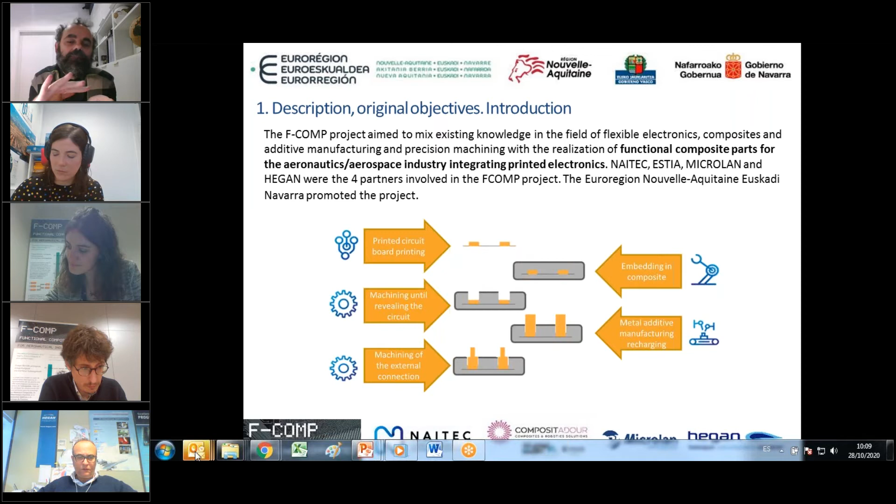The results and process of flexible electronics composite machining has been shown as a success, and we are now in a position to offer this technology, sharing it between different partners, companies and specialized groups where this task is needed. This is the concept behind FComp. We need to do a lot of work choosing materials, choosing different technologies, and how to do the composite, how to do the circuitry.

We will show it briefly in the next minutes, but now let me introduce in more detail our partners. So Martin, please.

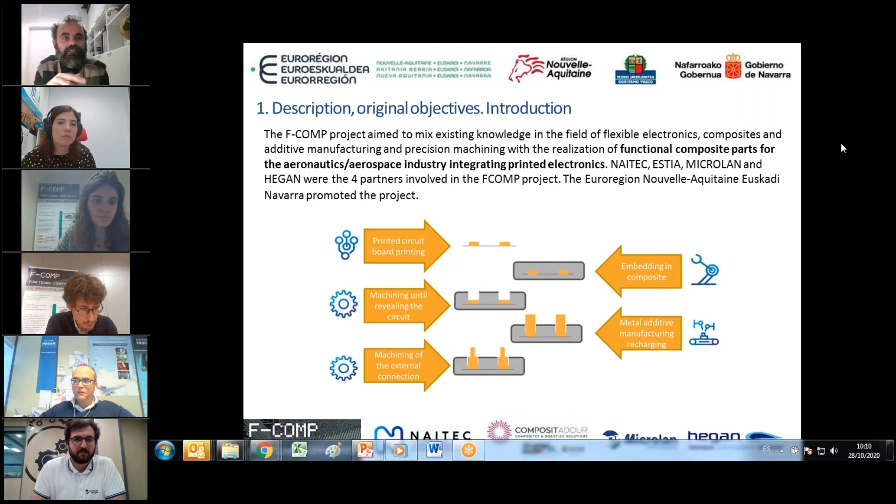We start with the centers at both sides of the Pyrenees. There are two centers. One is NAITEC, located in the Navarra region, focused on mobility and mechatronics. We focus our attention on this new way of moving, how to electrify vehicles, how to share information between infrastructure and vehicles. Within this framework, we develop flexible electronics for the automotive sector mainly, including electronics within interior parts or other plastic parts you can find inside any car, like headliners, seats, rooftops, etc.

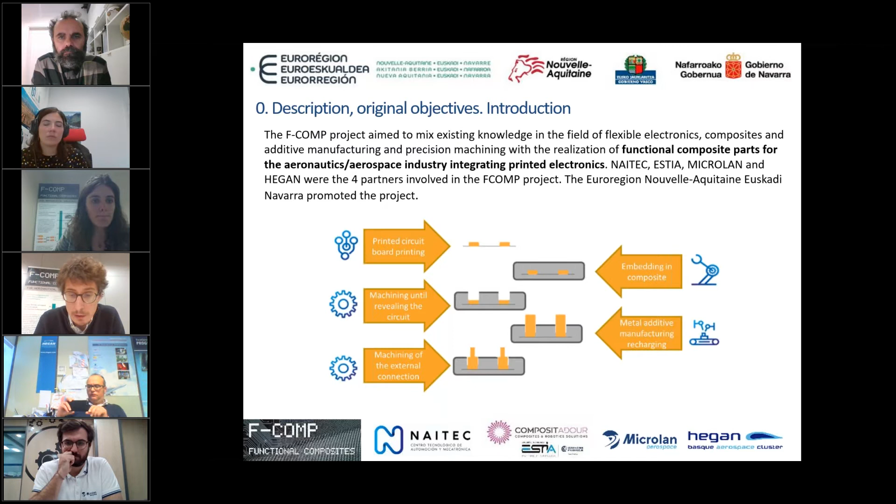As Fernando has explained in the presentation, the initial idea of FComp was developing the embedment of sensors in composites by doing 5 tasks done in a row. First, building a sensor, embedding it in the composite, then machining for revealing the contacts, putting some copper on these points, and later manufacturing the final contacts. This is the initial idea.

Putting this a little bit on the ground, the idea is just taking, as said, one sensor—you can see in the image on top—and putting it in between different plies of a composite material. For that, we need to first make the design of the sensor. In this case, we have decided to do a strain gauge sensor with three gauges. This is just for the purpose of having a sensor, but indeed we can put whatever other design.

The design included not only the sensing part, but also how the connections go outside. After this initial design, the project moved into a trade-off for material and process selection and manufacturing.

You can see in the middle image below all the process steps we followed, where we needed to do some iterations that I'll explain later. Finally, we verified that our full design is okay by doing some testing, mainly mechanical tests, as well as some functional testing.

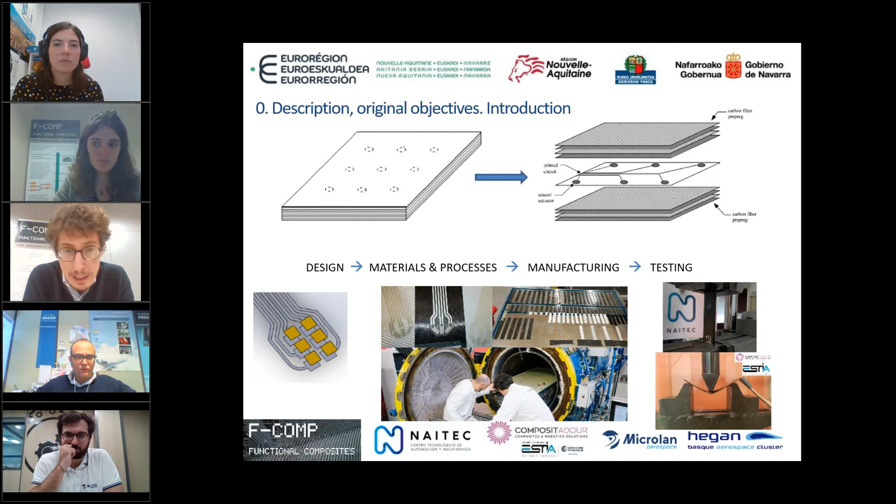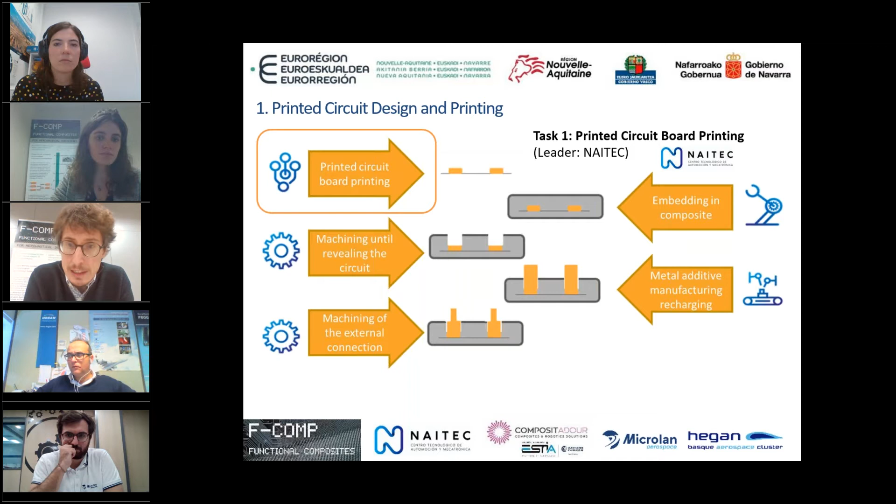Let me go step by step explaining what we have done. The first task was the printing of the printed circuit, a task led by NAITEC. We followed a series of trade-offs, starting with the sensor design.

As previously explained, we selected a strain gauge. We made the detailed design of the sensor itself plus the contact, and we started iterating because the thickness of the tracks is related to the capacity of the process for manufacturing the track with the ink.

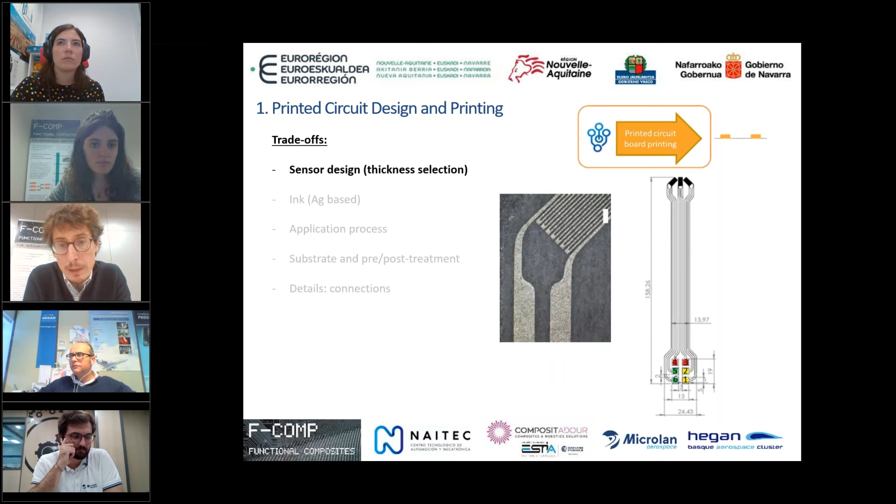So we made a trade-off between different thicknesses, reaching an approach where 70 microns thickness of the track was selected. The image in the middle shows those small tracks at 70 microns. As said, this is linked with the selection of the ink.

We made a trade-off between different inks that we have in-house. NAITEC has very good relations with some companies manufacturing inks here in Navarra. And then we did this trade-off of properties of the ink, which is also related to how we do the process.

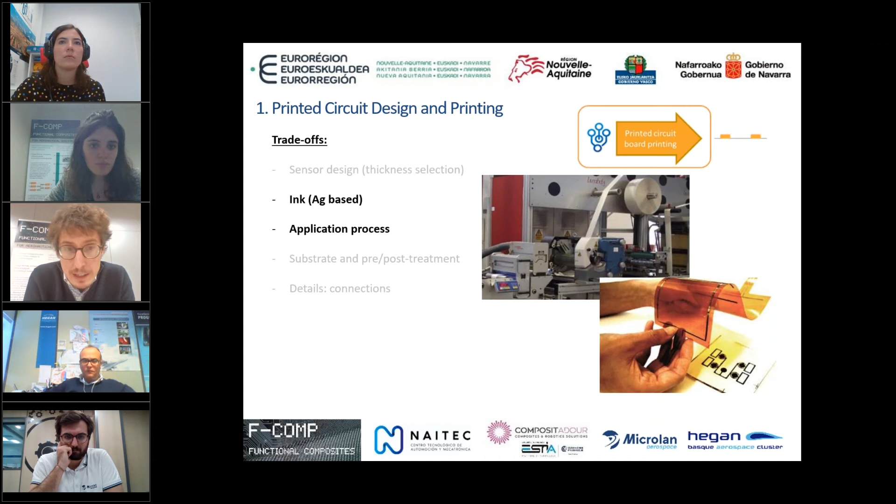We need to prepare the surface material, add additional dielectric material, decide how many layers, and how we put it in the oven. This is very iterative, and mainly related to the substrate that we use.

We tried 2 or 3 types of paper. We used carbon fiber, glass fiber, and polyimide (Kapton) for doing the trials, because some of them have good properties for some things and others for other things. Finally, we reached the conclusion that the best balance was with the Kapton.

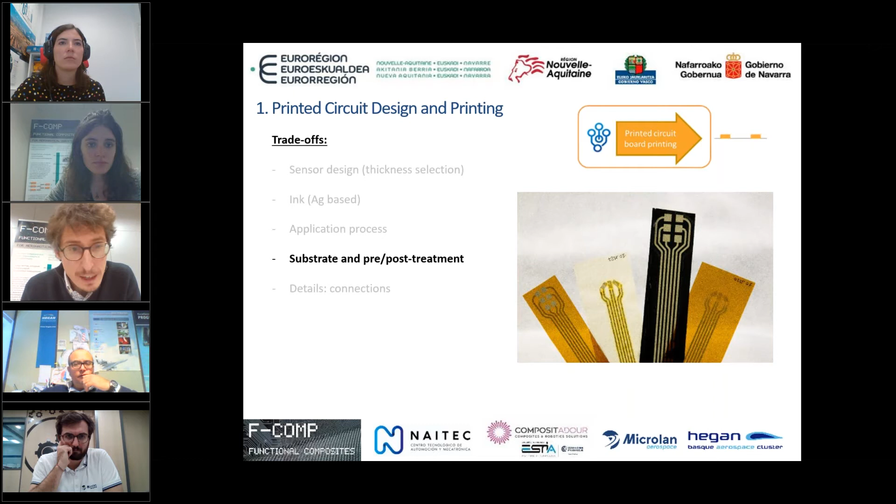We found during the project that we needed to define some details like the connections, because some points were not as good as we wanted, and we needed to look for a solution. You can see in the image, using adhesive conductive glue and putting in some connectors. We needed to make some details that we'll explain further later on.

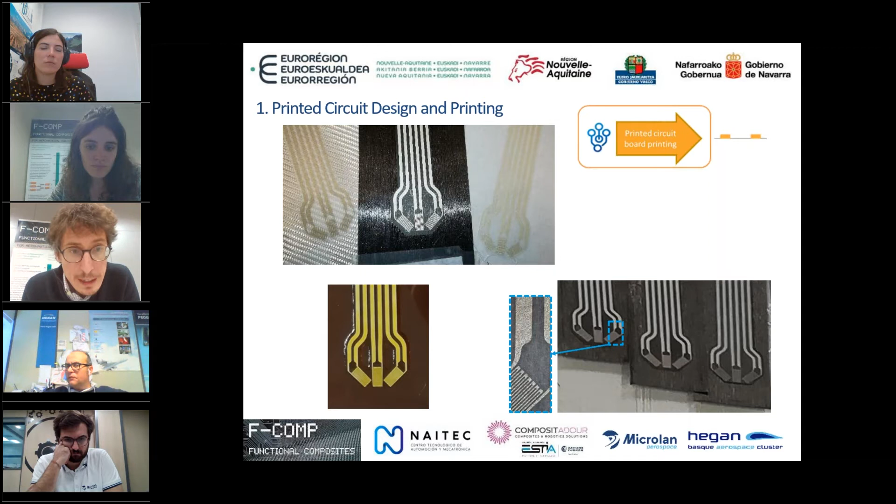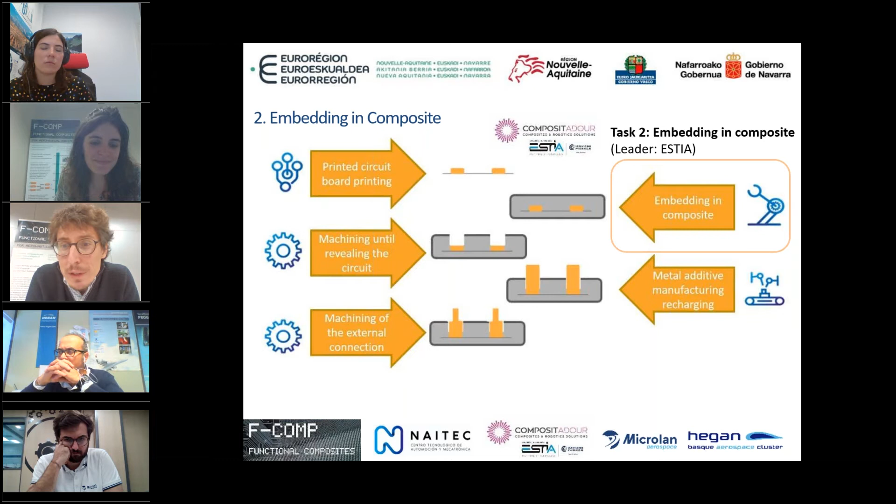We took these almost 200 samples to COMPOSITADOUR so they could start with the embedding in the composite. First was the selection of the material to be used: an unidirectional carbon fiber prepreg, very common in the aeronautical sector, which COMPOSITADOUR is very familiar with, so it's easy for them to work with.

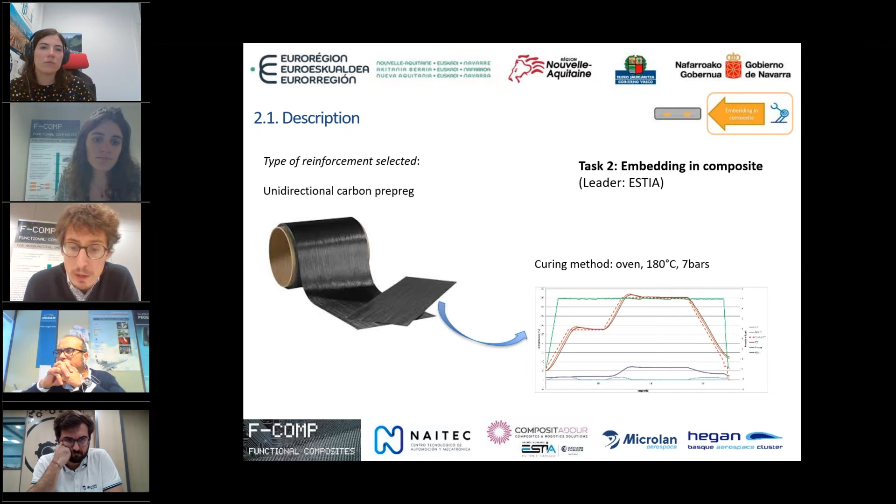This material, after doing the stack up, is sent to cure in the oven at 180 degrees with 7 bars for about 2 hours, and then we get the final samples with the sensor embedded in the composite. With that, we started to verify the best solution of substrate by checking how we minimize the mechanical impact and delamination problems.

The first test we did was the tensile test. Here we saw, as you can see in the graph on the right, some reduction in mechanical performance. To check that, we prepared some coupons without the sensor inside, taken as the reference, shown in the column furthest right, and you can see how, depending on the substrate, the maximum tensile strength decreases.

We saw that the most promising were the papers with different grams, and even with them we had a reduction of about 7 to 18%. Even with the polyamide we had this 18%. In any case, it was below 20% reduction of the properties of the full part.

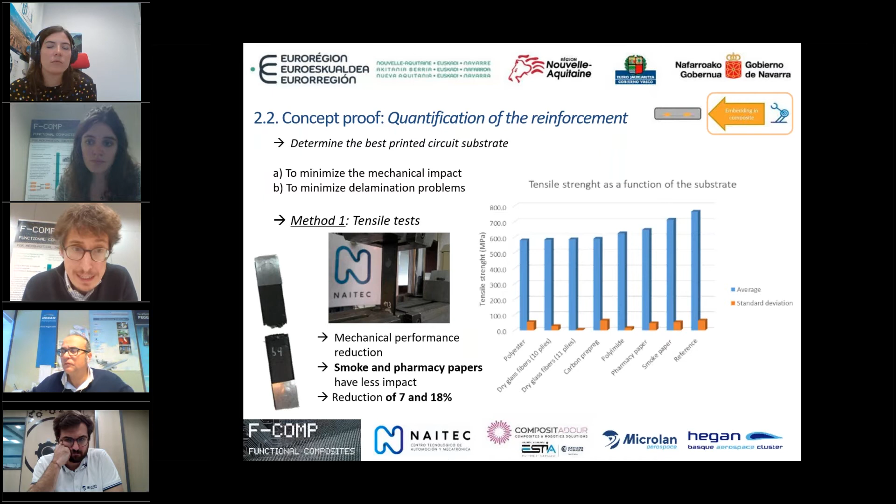Second test was checking these samples against bending. Here we saw the same issue. In this case, we have the reference on the left - sorry for these mirror images. You can see there is a decrease in the mechanical performance of the material.

Again, pharmacy paper is the one that has less impact, only 4% reduction. But the column further to the right, using dry glass fiber, shows a very big reduction. Why? Because the resin was not properly transferred, since dry fiber was put in between the pre-preg, and the resin didn't go between the dry fiber.

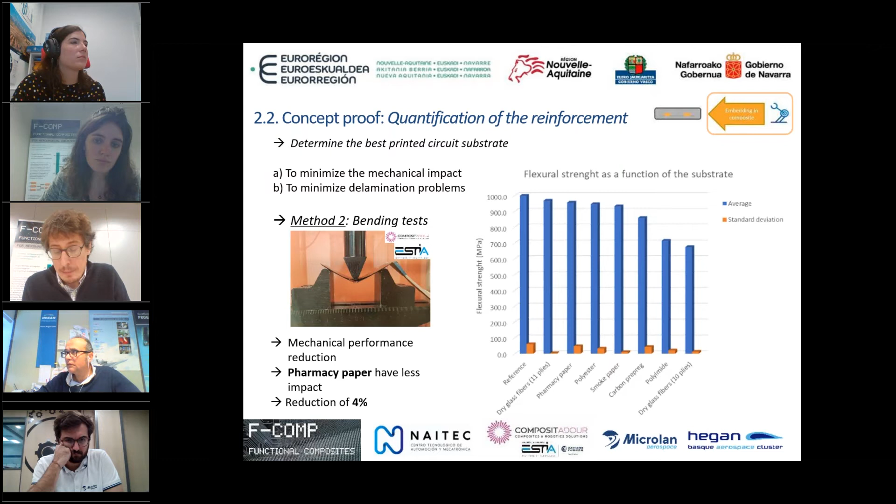Then we didn't manage to do the proper shear transfer between the different plies. For verifying these findings, we built some finite element models to see if what we were seeing was caused by the material, by the test itself, or whatever.

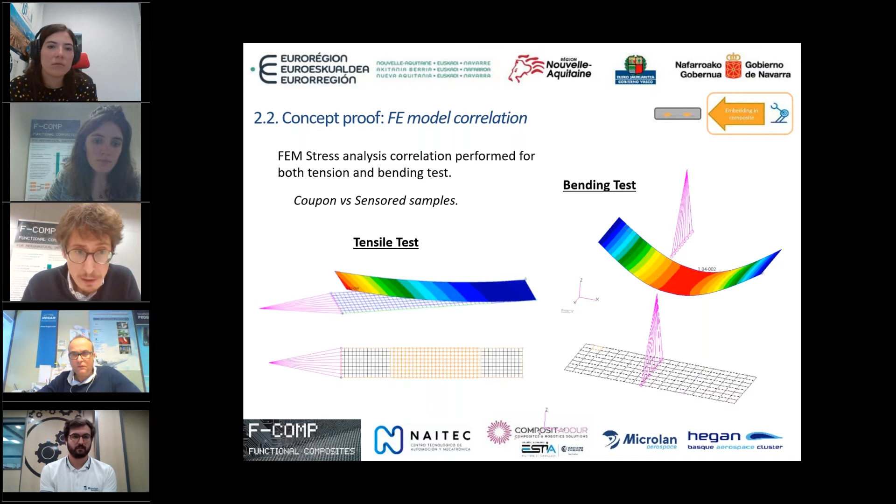We verified with this comparison between the coupon and the sensored samples that when we put a sensor in a certain position of the composite - in this case almost the most outer position of the layup - we started with a symmetric and balanced solution, but once we put the sensor, the final stack up is unbalanced. This makes that even with a simple tensile force, you see a deformation, so we already need somehow to balance this.

Related to the explanation I gave about shear transfer, in the bending test this is clearly shown: depending on the substrate, if we don't have a very good shear transfer, the bending test fails quicker. This is because the two materials separate, just at the sensor, and then it breaks the thinner part, and then it breaks the other part. So this is the failure mode in the bending test.

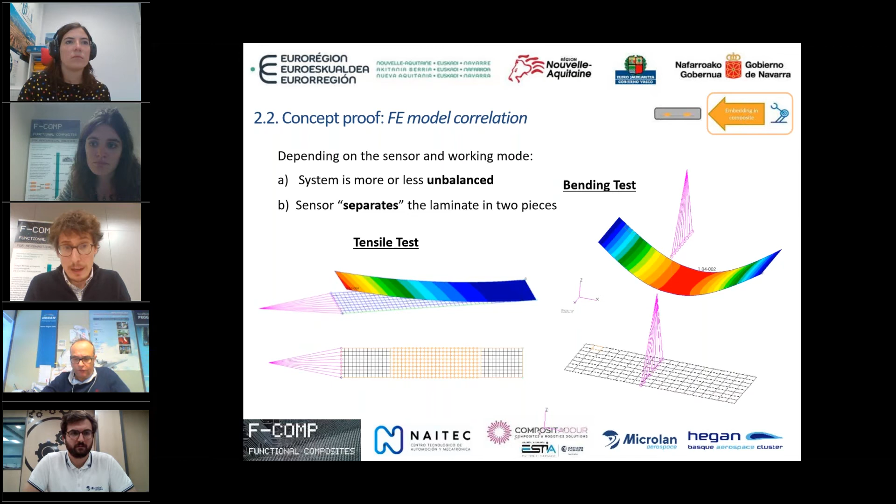So this is something we have already solved - we have seen how to do that - but it's something we have realized is important for escalation of this process: having a very adequate curing of the sensor before putting it in the oven.

With other substrates, for example with paper, the issue was related a bit to the CTEs of the different materials, causing deformations between layers - the carbon against the paper - which makes the ink crack because the difference in deformation generates stresses inside, and the tracks are broken. So you can see in the bottom line an insulation problem: we started having some resistance in the track, and finally we have zero. So it does not work.

So this is why, even if the papers were the most promising solution in terms of mechanical properties, in terms of functionals we have to discard them.

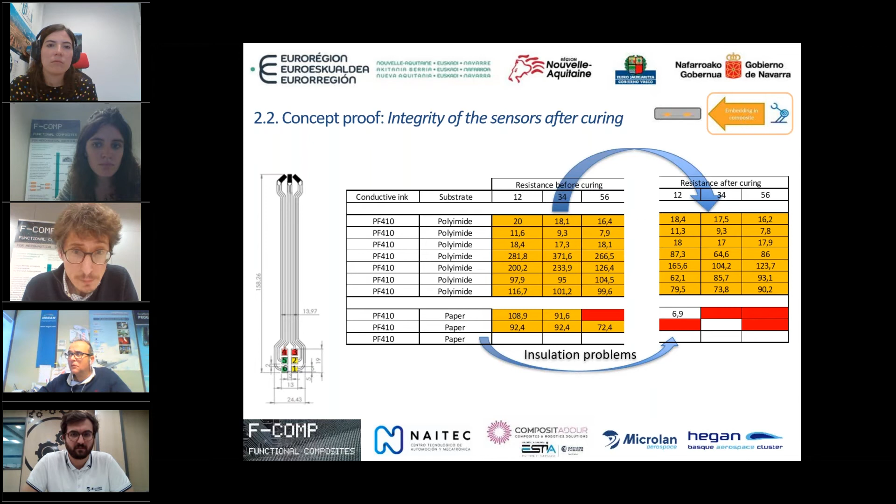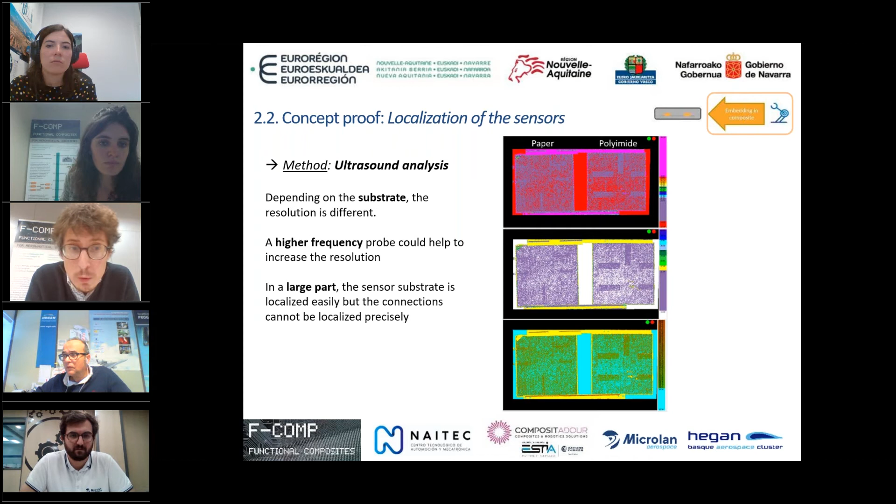The main conclusions from this task are that the mechanical properties of the full composite are reduced, but this is something that can be somehow improved by the design of the way of producing the material, and by the design itself at the preliminary stages of making a component.

The integrity of the sensor is improved by getting a proper cure of the sensor before putting it in the oven with the composite. And for the location of the connections...

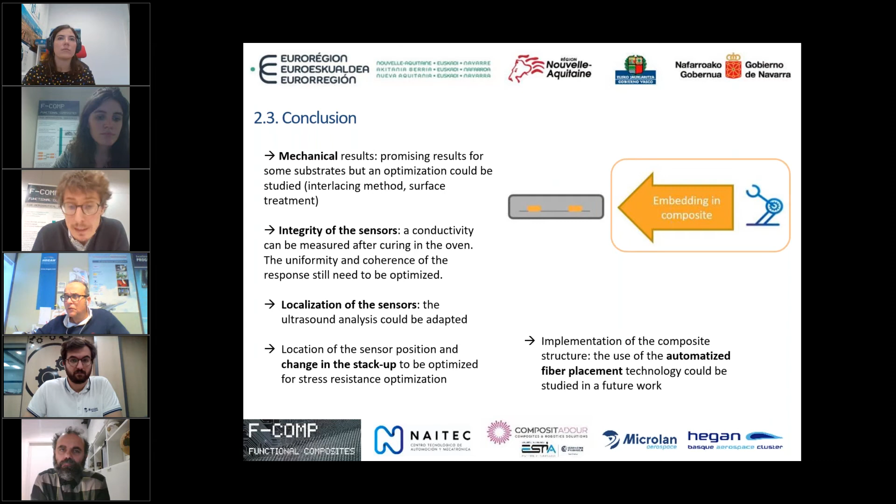It is needed to add some reference for better machining, and even using automated fiber placement will help. COMPOSITADOUR has a lot of robotics experience, and for this automated fiber placement they have contacts that could help. In this case, for F-COMP it has been done manually, as you have seen in the video, but this is something that could be added in next projects.

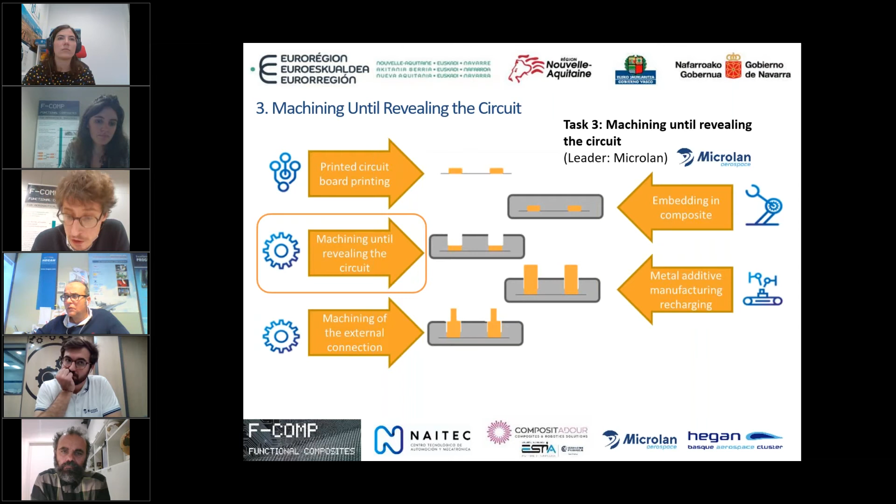For task number 3, the revealing of the circuits, the leader was MICROLAN Aerospace. Here, as per the use of composites, there are two main issues. One is the anisotropy, that makes the fracture mechanism of the part during machining different depending on how the tool goes against the fiber, generating different angles and different breaking mechanisms. Another point is that the fibers themselves are very abrasive, so the tool wear is very high.

For solving the issue of the anisotropy, we need very sharp cutting tools. But on the other hand, for solving the highly abrasive problem, we need to put some coatings on top of the cutting edge that reduce this sharpening of the edge. So it is needed to do a balance of these two things.

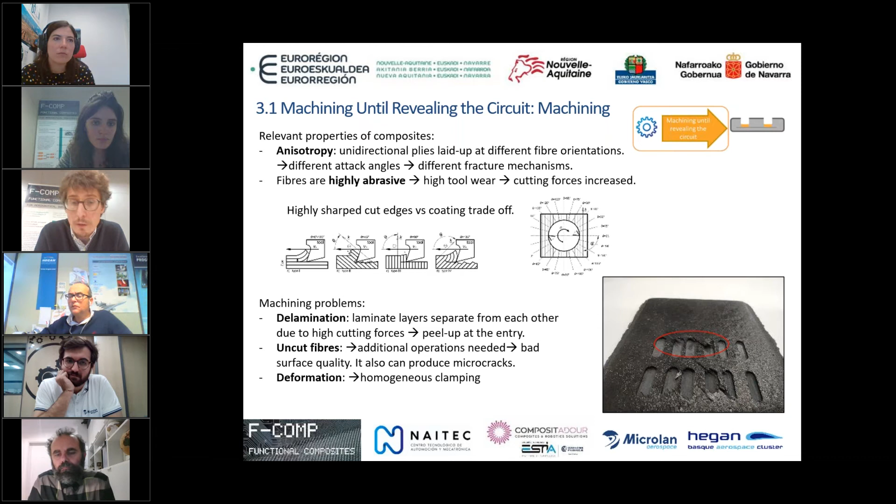The problems that MICROLAN found in the machining - you can see in the image bottom right, there are different trajectories or different ways of trying to do the same machining. Some are more promising than others, but broadly we can conclude that we have delamination if we don't treat it properly. The samples in the middle are more damaged than, for example, the ones on the right. There are uncut fibers, which has to be solved because they can produce micro cracks. And the deformation of the part when cutting is very important, as it generates imbalance, producing deformations unwanted for proper machining.

Another point included in this task is trying to reveal the contact points for doing the additive next step, that is adding the copper to the contact. MICROLAN used a drill process for trying to reveal the position of the contact, and it was seen that not having an external reference, or not having considered it since the beginning, makes it very difficult to reveal the contact, as it's not possible to take a proper reference.

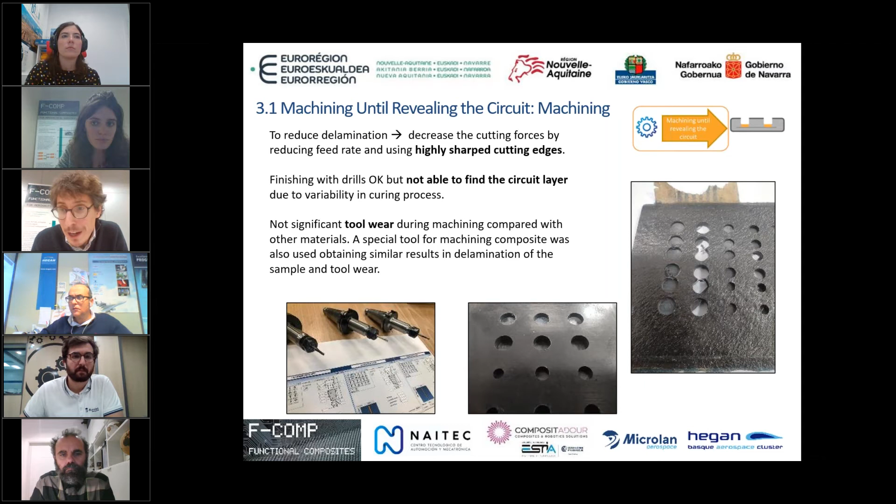Regarding the wear of the tool for the drilling, as per MICROLAN's experience, it is not a big issue. Guillem, later on, if you want to further explain, we will have a moment. Okay, I continue with this, and later on we'll go in further detail.

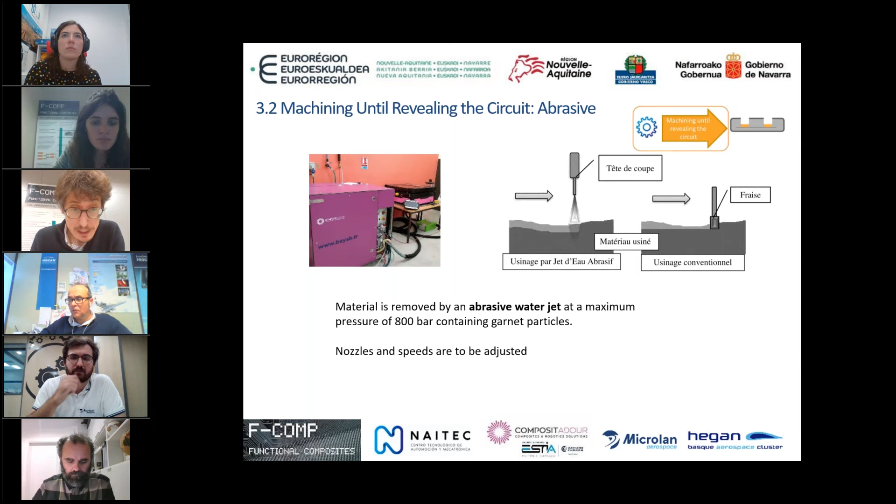Taking the opportunity that in COMPOSITADOUR there is a machine by Bayab that does abrasive water jet machining, we did some trials. This machine uses nozzles that shoot water containing garnet particles at a pressure of up to 800 bars, and it moves over the surface, removing part of the surface just by abrasion, as you've seen in the video. The point here is selecting the proper pressures and speed of movement of the nozzle. This way you manage to have more or less revealing of the surface. You can see in these photos the final aspect of the samples.

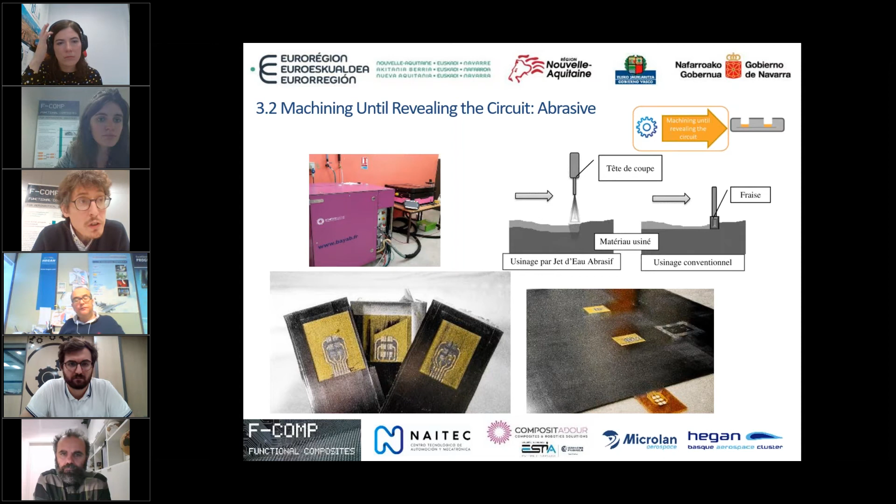By adding some additional copper plates, for example, in the sensor at the initial phases, this kind of solution could be improved.

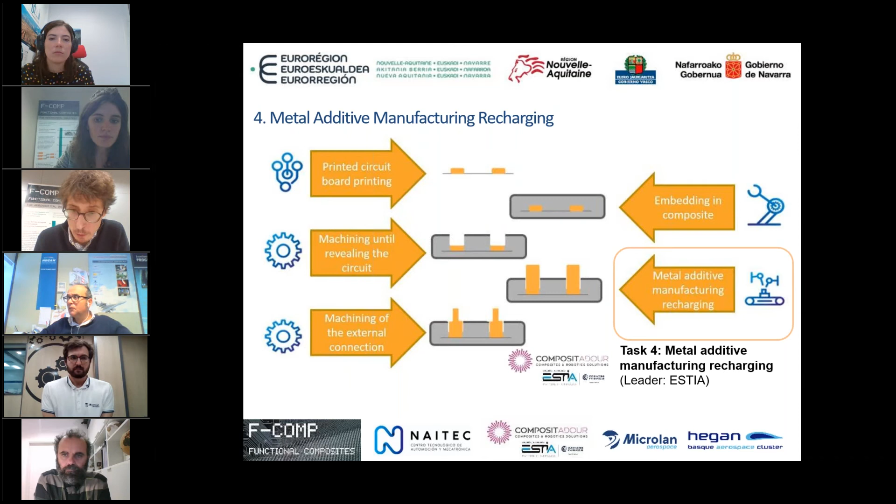Fourth point is, with this part revealed, adding recharging material to the sensor. This is also led by ESTIA, and they have in their own facilities the company called Cometa Technologies, who are experts in this kind of metallization. In this case, the process has been a bit iterative.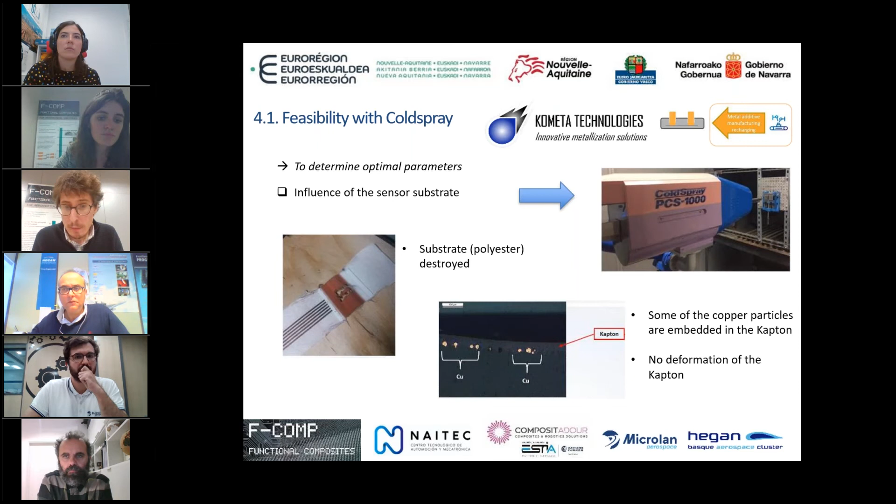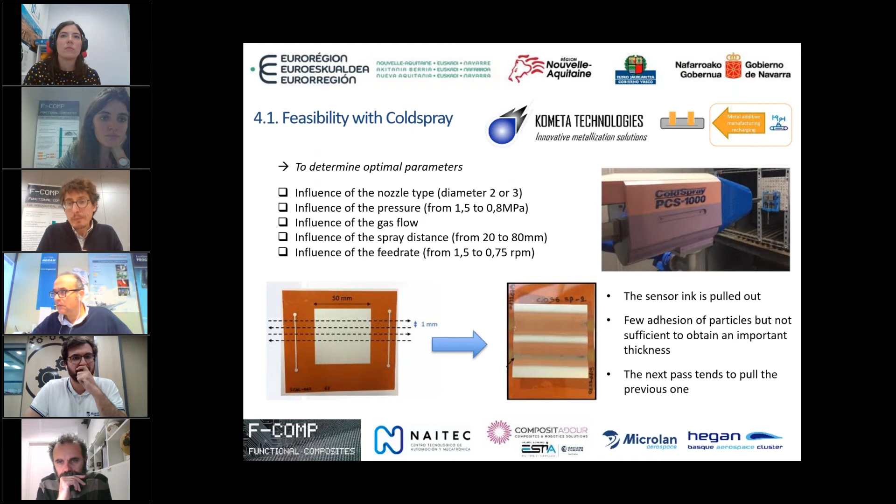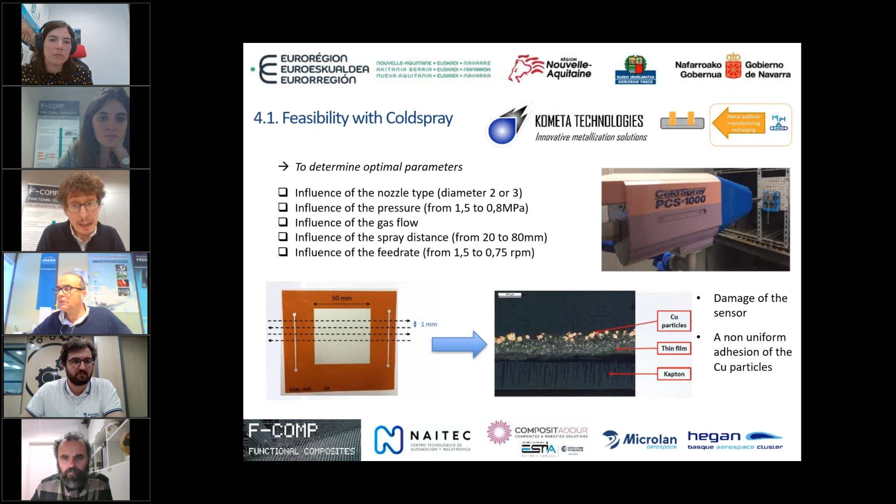Even adjusting later on the type of nozzle, the pressure, the gas flow, we saw that very few adhesion of the particles could be granted, because even when you pass one time and go back over that, you remove what you had put before. So we have a very non-uniform adhesion of the copper to the kapton, and the sensor is damaged. Functionally speaking, this is not a valid solution for this application.

This put us in the situation of looking for alternatives, like copper electroplating, using conductive adhesive, or even soldering. This is basically because the cold spray is good for certain applications. In metals, this is perfect, and Kometa and COMPOSIT'ADOUR has worked on it over the years. But for these very smooth materials, it is too powerful to have the deposition.

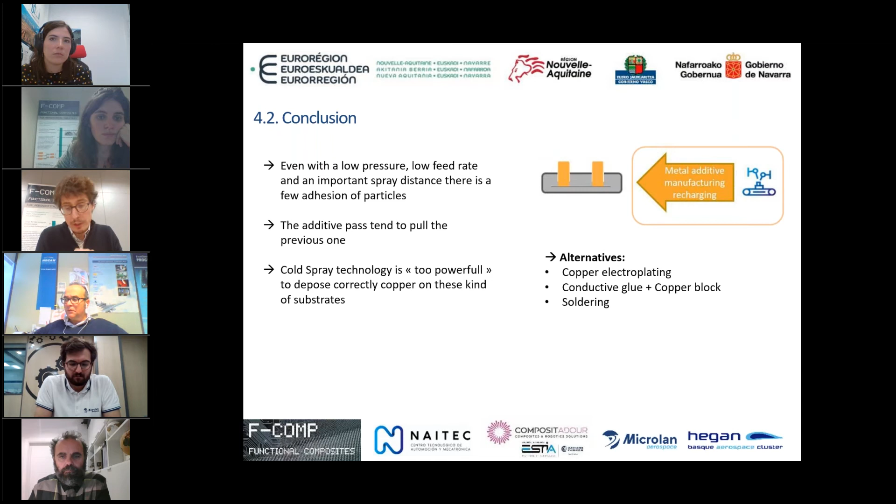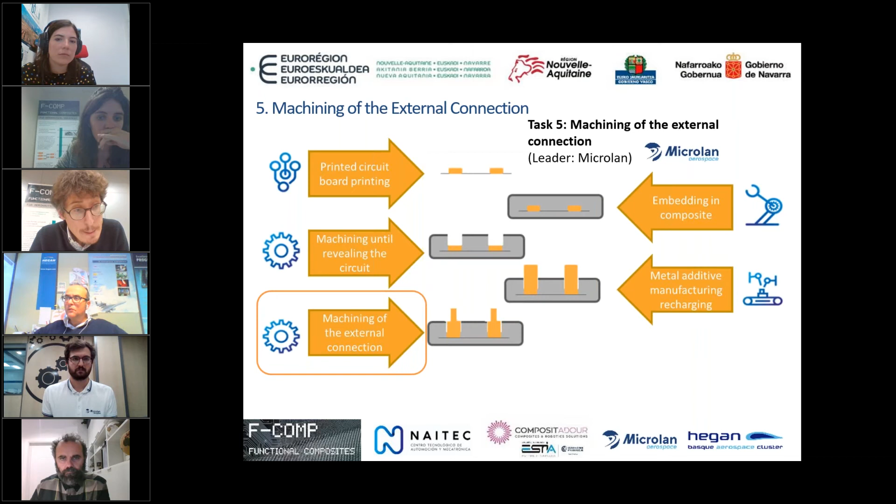So, well, it's a lesson learned from this project. This gives a problem for the next step, the machining of the external connection. This task in principle was part of the MICROLAN part, but what we did was look for alternatives for putting the connectors. We tried to find a proper conductive adhesive that could be applied and withstand the high temperatures later on in the curing process of the composite.

We tried as well with different kinds of solderings, because the temperature is 180 degrees in the oven, so we cannot use the typical soldering that is more easily accessed. We used some solderings that have very high melting points, but the solution was not very good, because of the very thin substrate laminate that we have.

Finally, continuing with the use of conductive adhesive, we tried to put some connectors. That works quite well, but it needs to be considered in the design before putting them in the composite. So we finally decided to just put the conductive adhesive in the contacts, finalizing the project with that.

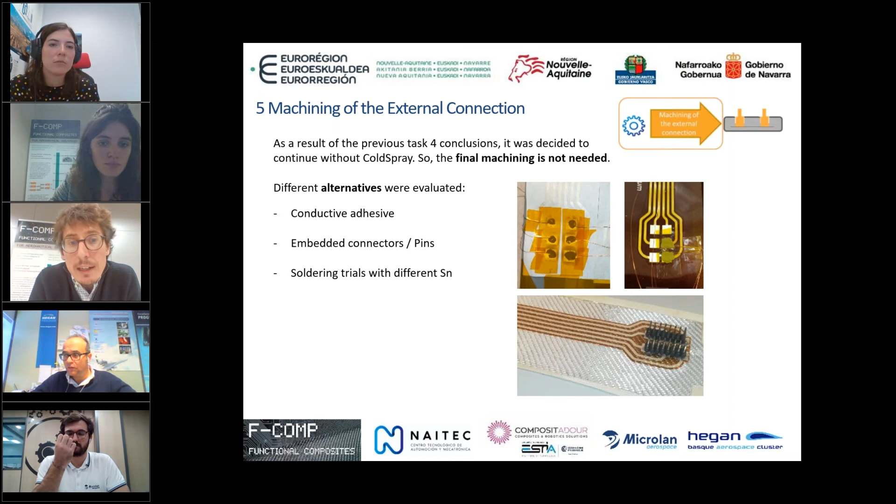The final conclusions for all of this, I'll start by the end. The TRL4 is obtained. We have completed the testing successfully. We see that the solution is feasible, and the next step will be the escalation. For that escalation, we have to improve some points, because it's somehow a very manual process that needs some fine-tuning. But apart from that, the FComp project is a success in its definition.

We have a feasible design for the sensor. We have obtained a process for manufacturing, and a very good selection of the materials. In this case, we will go with the polyimide, with the Kapton. And we have learned certain points that have to be considered when putting this into a final solution.

First of all, when selecting where we want to put the sensor, we have to consider it since the design phases. We have to make our stress analysis considering that we are going to have this reduction in the stress capabilities of the part in a local area. As well, the location of the connector has to be considered in the design, because it has to be an accessible point, but also a point where we can have access to the harness or to the machining point.

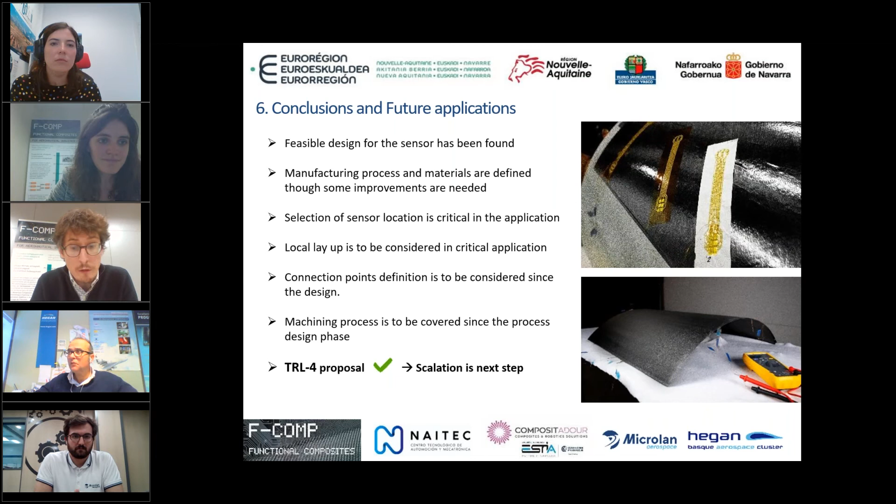Basically, this is all the conclusion. We are quite happy. We have obtained this TRL4, and we think this solution aims to go a further step and integrate it into different industries.

Our idea is that for aeronautics it's quite straightforward. We can include it in all the composite structures that are in a plane, just for health monitoring or even in-flight checks. We can see if we are flying in a storm, for example, what are the maximum loads that we are seeing in that moment. It's a very unlikely case nowadays to have a breakage in flight, but okay, we can have it.

But it's more related to maintenance. We can optimize the times between each maintenance moment, and this can be done without needing to stop the plane from flying. The check is already done just by the structure itself: okay, I have consumed this life, I'm okay, I'm not okay. You don't need to stop and do further analysis and inspections, and that finally saves money.

For space, for example, it's more or less the same. Nowadays we are seeing this very frequently. It's true that SpaceX, for example, is flying its rockets, its Falcon 9, going back and forward. They reuse the rocket.

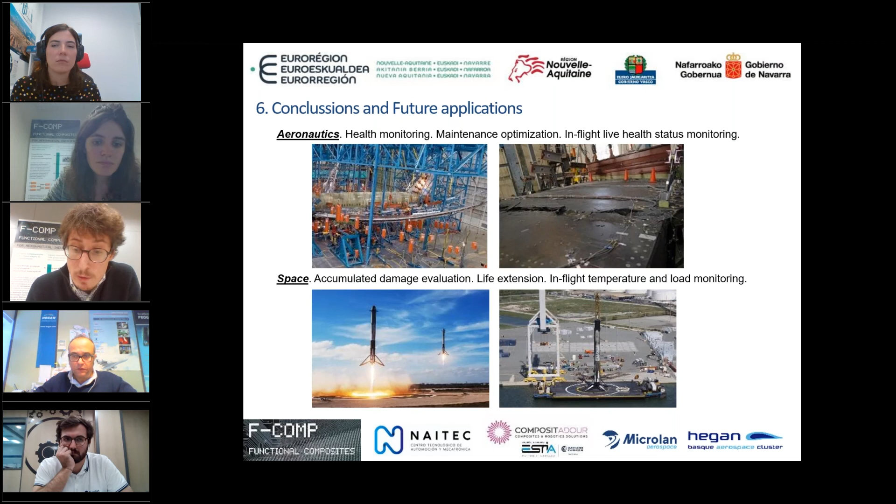If you measure the stresses that this structure has suffered during the flight, you can easily decide whether you can extend the life of the rocket, or in that case you need to scrap it, because maybe you've had a flight with a lot of turbulence, the pressures were whatever, and then the rocket is more damaged. So that as well will help in saving money.

For urban mobility, we have seen that there are applications currently especially in the electric car, where the composite material is more used, and especially in this car sharing that is common in big cities. The owner of the cars can check how good or how bad the driver is, just by measuring the stresses that are seen in the car.

This way you can change the tariffs. The cost for the user can be higher or lower depending on how good or how bad he or she is. This is the same for the insurance. They can double check whether the event where something is broken has happened in a certain moment or not. So this will change as well the tariffs that are applied to the users.

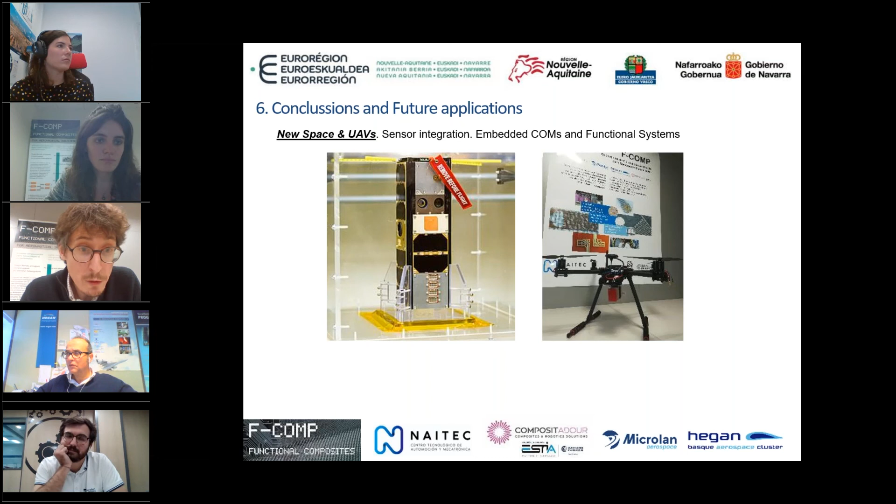So we think this is a very promising application that can be used as well for these new UAVs and new space systems. So that's all. Thank you, hope you have understood well what I have tried to explain.

But in any case, we are here now. We have some minutes, no, Martin? Yes, for answering some questions or generating some debate. I don't know if we have questions in the chat or not.

If not, I don't know, Anaïs, Guillén, do you want to add something? I mean, what is your experience with F-COMP? What has been the benefits from your companies, from COMPOSITADOUR and from MICROLAN?

So for COMPOSITADOUR, it allowed us to make a state-of-the-art of what is done in electronic printing and in-situ monitoring of composites, because we didn't work on it until the F-COMP project. So in my case, I learned more from you about electronic printing and from the machining also. So I think it was a nice project, and we obtained quite good results, beginning results.

And there is still some work to do on the mechanical part and optimization of the sensors. So I think it should be nice to continue to work on this, because it is quite innovative in the aerospace industry. So that's all.